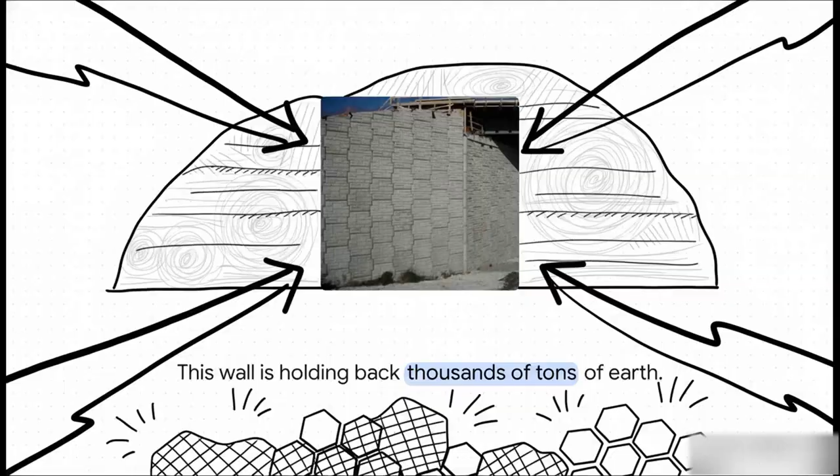Dig into the incredible, and often totally invisible, engineering that literally keeps our world from falling apart. Okay, just look at this thing. It's a retaining wall. You see them everywhere, lining highways and roads. And it looks pretty simple, right? Just a bunch of concrete blocks stacked up.

But that wall is holding back an unbelievable amount of pressure. Thousands and thousands of tons of soil pushing against it day in and day out. So how on earth does it not just explode outwards? Now, you might be thinking it's just super thick, heavy concrete. But the real answer? Oh, it's way, way smarter than that. And it's hidden deep inside the dirt itself. Yup, you heard that right.

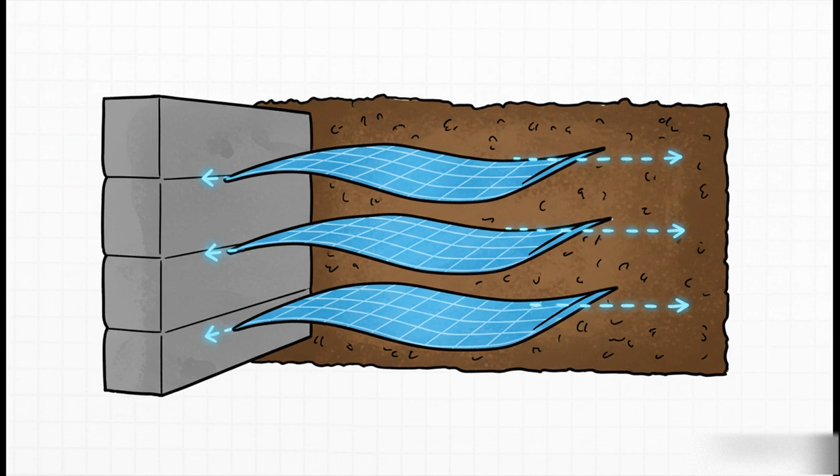The real hero here is layers of high-tech synthetic fabric. So today, we're going to unpack how engineers use these materials, they're called geosynthetics, to basically stitch the earth together. We're talking about building structures that not too long ago would have been considered pretty much impossible.

So to really get why this fabric is such a massive deal, we gotta start with a basic challenge that engineers deal with constantly. And that is, the ground beneath our feet, it's not always the solid, reliable foundation we'd like to think it is.

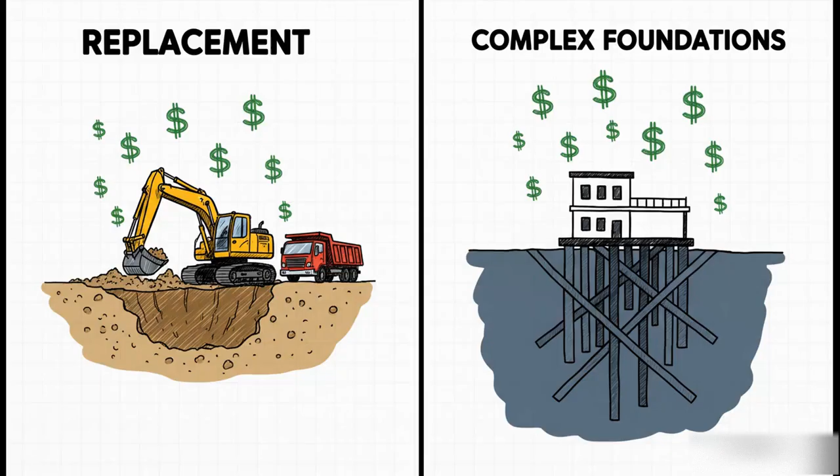You know, for the longest time, if you needed to build something on soft, weak, or just unstable soil, your options were not great, and they were super expensive. You either had to dig out all the bad soil and haul in good stuff to replace it, or you had to design these incredibly complicated and pricey deep foundations. You just knew there had to be a better way.

And, well, there is. The modern solution is to stop trying to fight the soil and actually start working with it. Instead of just replacing it, engineers figured out how to reinforce it, turning the ground itself into a crucial part of the structure. It's pretty brilliant.

And using these materials, these geosynthetics, was a total game changer. All of a sudden, projects got way cheaper and you didn't need as much space. Since the materials are made in a factory, the quality control is amazing. And all of that leads to faster, more efficient construction with a much smaller environmental footprint. It's a win-win-win. Now, the workhorse of this whole revolution is something called a geotextile.

Think fabric, but forget about cotton or wool. This stuff is made from seriously durable synthetic polymers, like polypropylene. It's porous, so water can get through. And it comes in different styles. Some look like felt, others are strong woven sheets, and each one is designed for a specific job, whether it's reinforcing, filtering, or separating soil layers.

Then you've got its close cousin, the geogrid. It's basically a plastic net with these big openings. And those openings, engineers call them apertures, are the whole point. They let rocks and soil poke through and lock right into the grid. This creates this incredible interlocking force, giving the soil a kind of strength, tensile strength, that it just doesn't have on its own. It's what keeps it from being pulled apart.

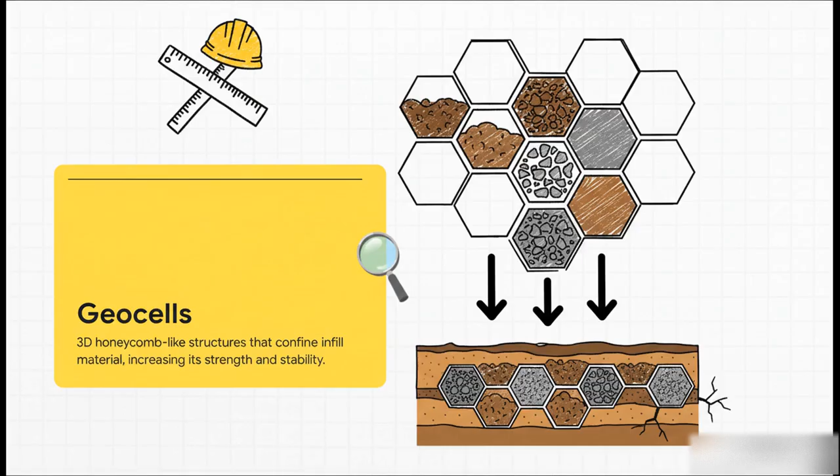Okay, so we have these incredible materials, but how in the world do you actually use them to build a wall? I mean, we're talking about something made out of what is essentially just fabric and dirt. How does that work? Well, the result is what engineers call a mechanically stabilized earth, or MSE wall, and they come in all kinds of shapes and sizes.

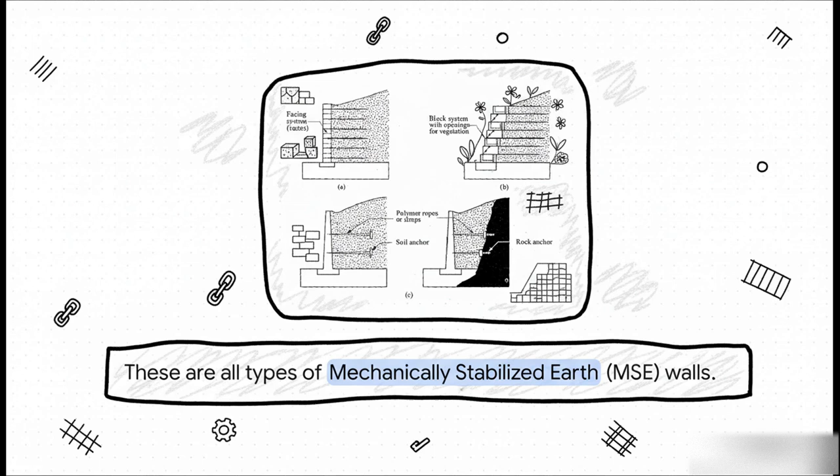The part you see on the outside, the facing, can be concrete blocks, wire mesh, or even systems designed so you can plant vegetation right in them, making the whole wall blend into the landscape. But behind that facing, the principle is exactly the same. The way you build one is just brilliantly simple.

First, you lay down a sheet of geotextile, but you leave some extra hanging over the front edge. Then you put a layer of soil on top and you pack it down tight. After that, you just fold that extra bit of fabric back over the top of the soil layer, kind of locking it in. And then you just do it again. Lay, backfill, fold, repeat. You just keep going layer by layer, building up this solid, internally reinforced block of earth.

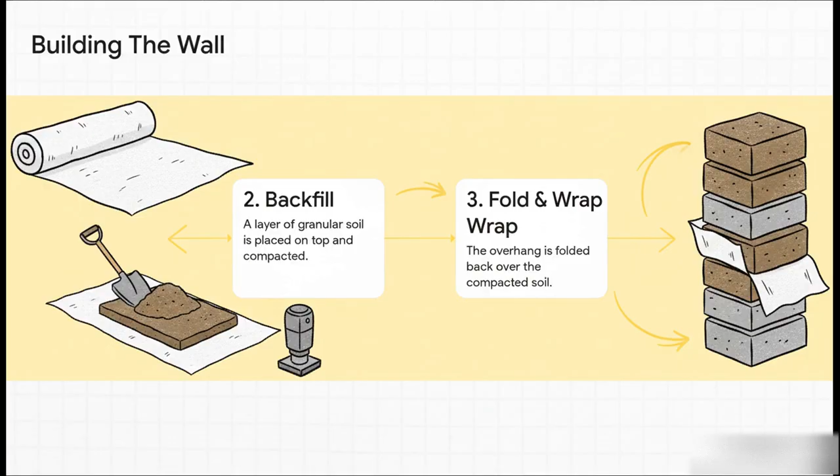Okay, so the process looks simple enough, right? But believe me, behind that simplicity, there's some really serious engineering science, making sure these walls are safe and are going to last for decades. So here's how the physics works.

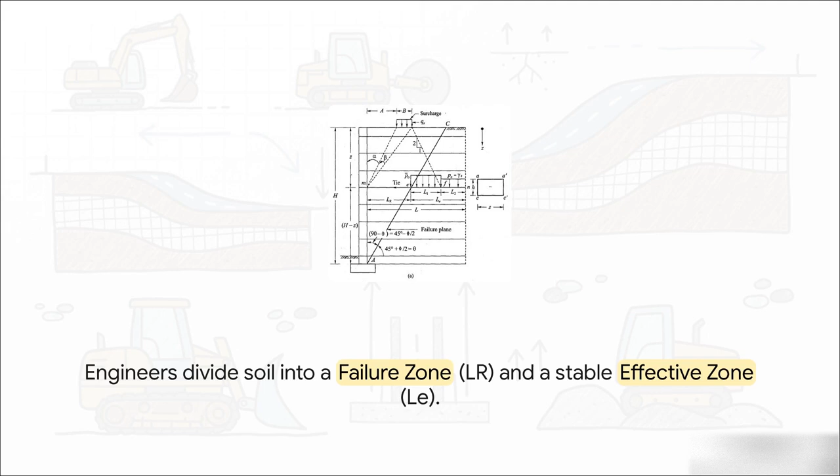Engineers know that if a wall like this were ever to fail, the soil would try to slide along a predictable curve. So they divide the soil into two zones. The part that wants to slide away is called the failure zone. The part that would stay put is the effective zone. The genius of it is, the geotextile only has to be long enough to stretch past that potential failure line and get a good grip inside the stable soil. The friction from the dirt above and below it does the rest, holding it tight.

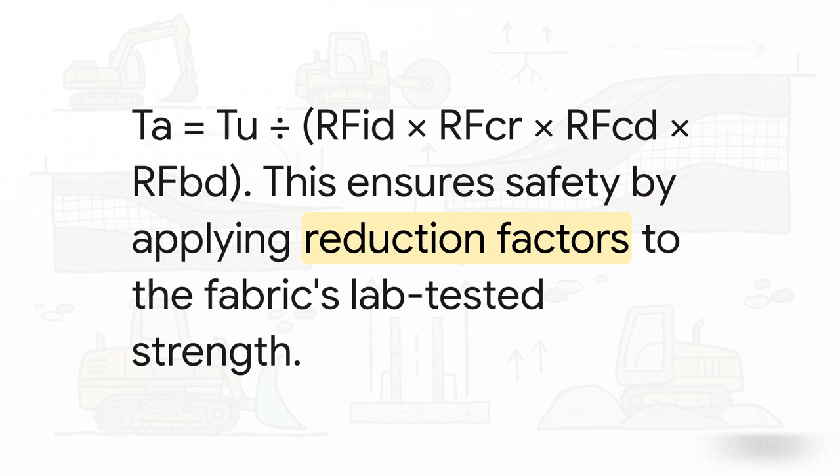And, of course, there's math to make sure everything is safe. Engineers start with the ultimate strength of the fabric that they test in a lab. But they never just use that number. Instead, they apply a whole bunch of reduction factors. These account for things that can happen in the real world, like damage during installation, the slow stretching or creep that happens over many years, and even breakdown from chemicals in the soil. It's a super conservative approach that makes sure the wall is safe for its entire life.

So, reinforcing soil is obviously a powerful tool for holding back slopes. But that's not the only problem geotechnical engineers face, right? What happens when the challenge is something completely different? Well, it just goes to show you that engineers have a whole toolbox for dealing with the ground. For an unstable slope, like we've been talking about, the solution is to reinforce it.

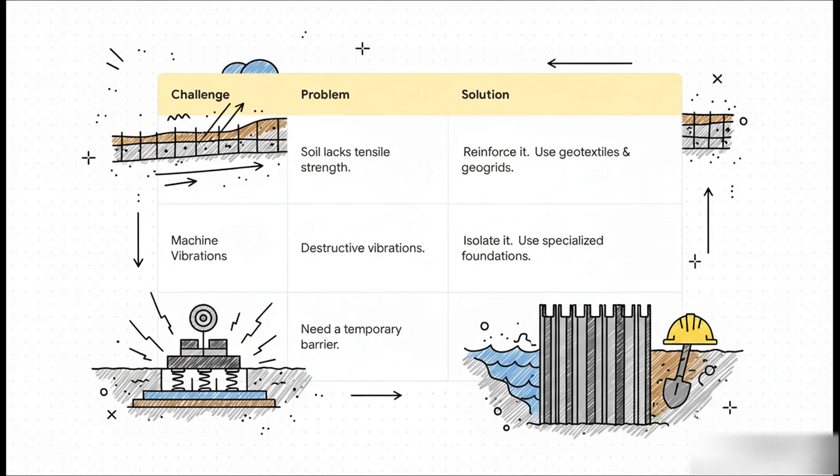But what about crazy vibrations from a giant industrial machine? You can't reinforce that away. The solution there is to isolate it, using special foundations to absorb that energy. Or what if you just need to hold back water at a construction site? Well, then you block it by driving huge interlocking steel sheets deep into the ground. Different problem, different tool. And all of this really brings us back to our main idea here.

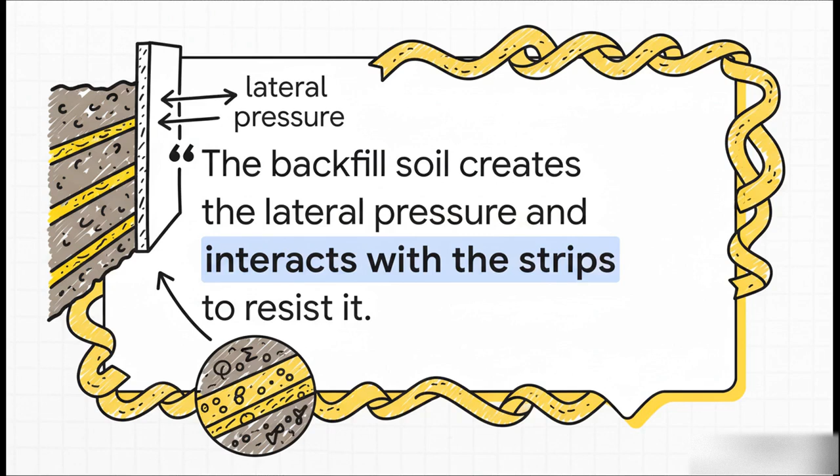A lot of the time, the most clever, most important engineering is the kind you can't even see. It's working silently right under our feet. This quote just nails the whole concept. With these reinforced walls, the very thing that's creating the problem, that lateral pressure from the soil, is also being used to solve the problem. The fabric just lets the soil use its own weight and friction to hold itself up. I mean, how elegant is that?

So the next time you're driving and you see one of those massive retaining walls, you'll know. You'll know its real strength isn't just in the concrete you can see, but in those hidden layers of fabric inside. It kind of makes you wonder, right? If we can engineer the earth itself to be stronger, what other kinds of invisible engineering are out there, quietly making our world possible?